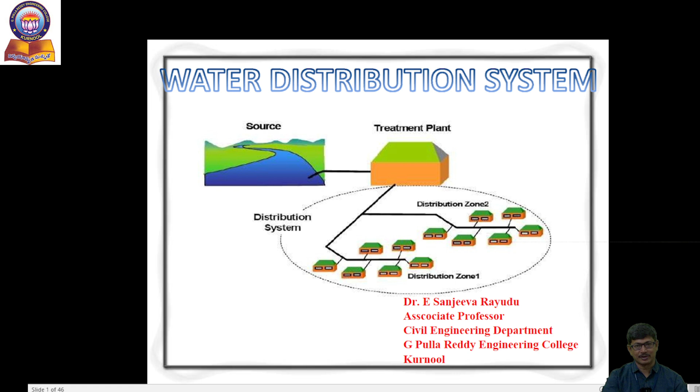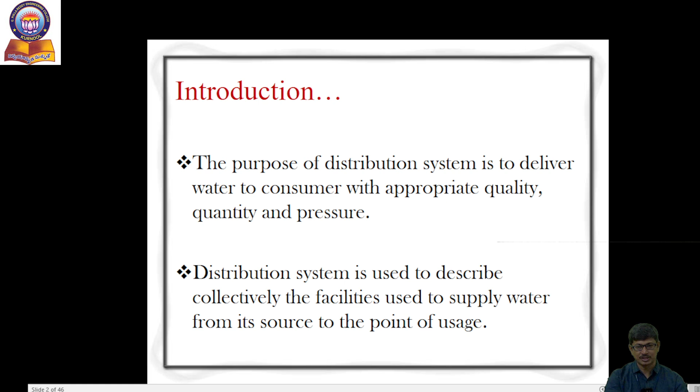The purpose of distribution system is to deliver water to consumers with appropriate quality, quantity and pressure. Distribution system is used to describe collectively the facilities used to supply water from its source to the point of usage.

Water quality should not get deteriorated in the distribution pipes. It should be capable of supplying water at all the intended places with sufficient pressure head. It should be capable of supplying the requisite amount of water during firefighting purposes.

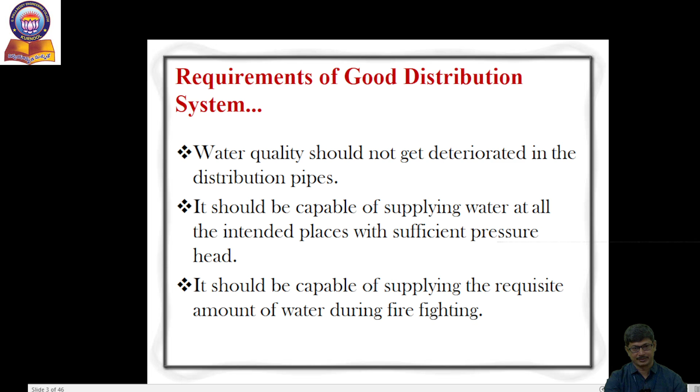So the main agenda of water distribution system: one is to supply sufficient quantity to each corner of town or city. At the same time, in case any fire is existing, we have to supply sufficient quantity for firefighting purpose. So the layout should be such that no consumer would be without water supply during the repairs of any section of the system. That is only possible by underground layout of distribution system, either grid iron system, ring system, or radial system.

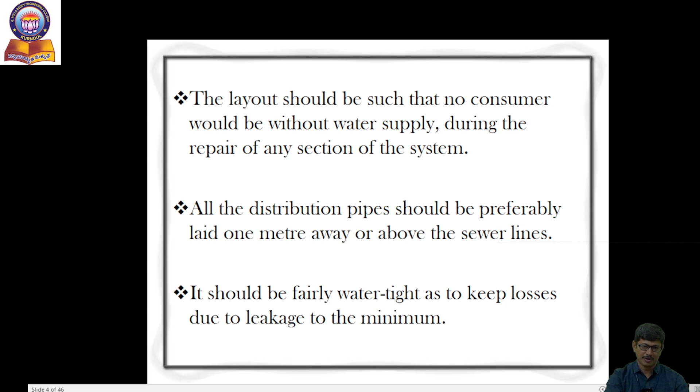All the distribution pipes should be preferably laid 1 meter away or above the sewer lines. At the time of designing, we maintain maximum distance as far as possible between water supply line and sewerage line. It should be fairly watertight so as to keep losses due to leakage to the minimum.

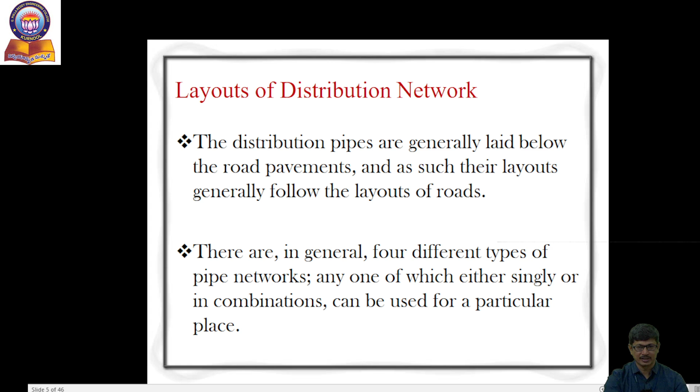The distribution pipes are generally laid below the road pavement, and as such their layout generally follows the layout of roads. There are in general 4 different types of pipe networks, any one of which either singly or in combination can be used for a particular place.

Various types of layout of water distribution system: number 1, dead end system; radial system; grid iron system; ring system. These are the systems of layouts.

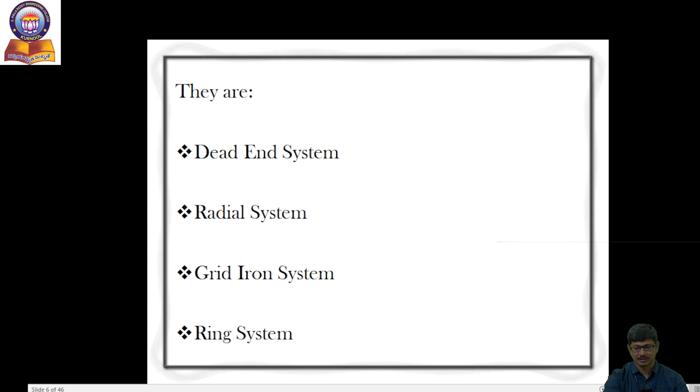This is a dead end system, also called tree system. It is suitable for old towns and cities having no definite pattern of roads, meaning whenever cities are developed in a haphazard manner, this system is more suitable.

In this system, there is only one main pipe, with branch pipes off the main pipes. This system contains fewer cut-off valves; for only one route, generally only one valve is provided.

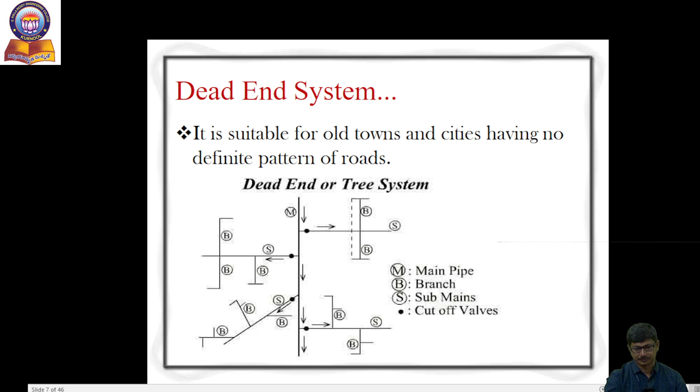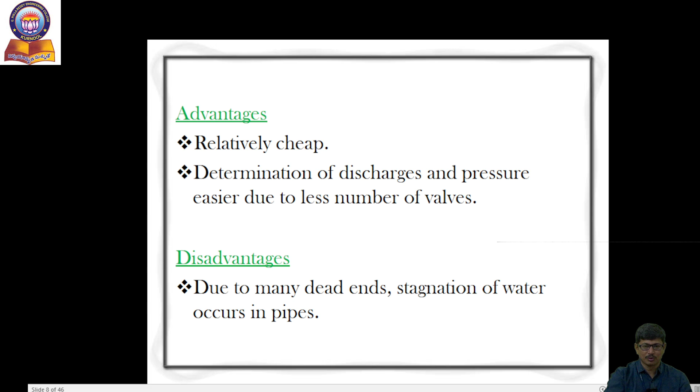The main advantages of this system: it is most economical, and we can easily calculate network analysis, meaning discharge and pressure in each line. Disadvantage: due to many dead ends, stagnation of water occurs in the pipe, which may cause pollution. That is the disadvantage of this system.

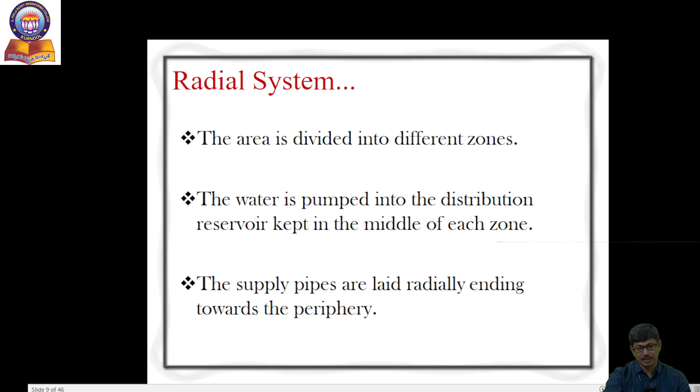This is a radial system. This system is suitable when cities have roads in a radial direction. The area is divided into different zones. The water is pumped into the distribution reservoir kept in the middle of each zone. The supply pipes are laid radially, ending towards the periphery.

This picture shows the radial system. A distribution reservoir is provided at the center, from where water is supplied along the road line in a radial manner. So the main advantages: it is very quick service, and calculation of pipe sizes is easy.

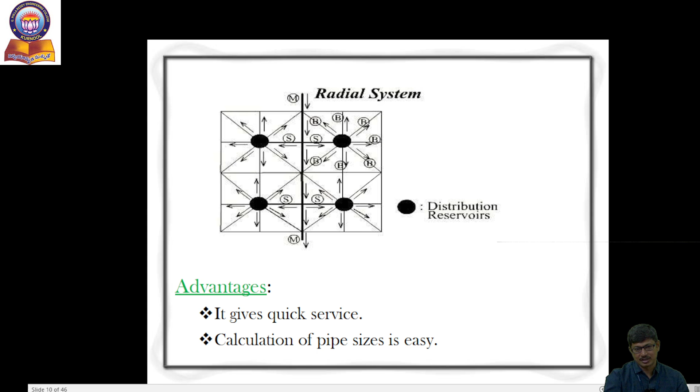Grid iron system: this system is adopted where the cities are well developed with well planning. In such places, generally the grid iron system is provided. It is suitable for cities with a rectangular layout where the water mains and branches are laid in a rectangular pattern.

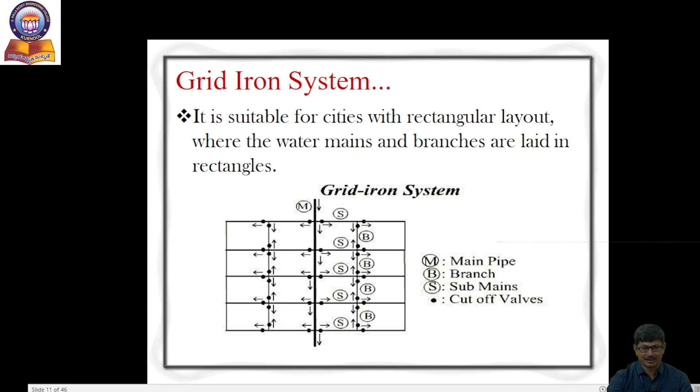In this system, one main pipe is connected to a number of branch pipes and sub-main pipes, all interconnected. The main advantage is due to continuous circulation, the possibility of pollution is reduced, and in case of any breakdown, we can supply water in another direction, in a number of directions.

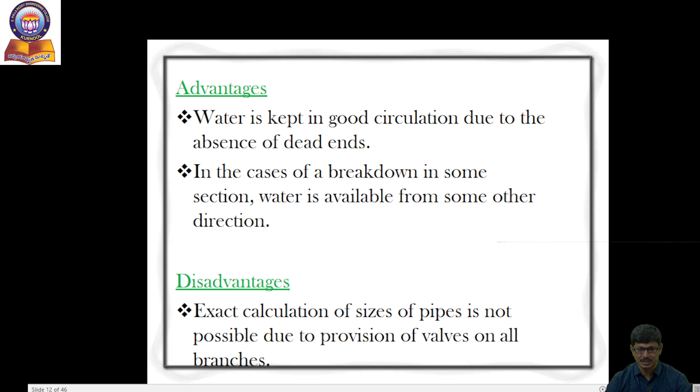Even if fire occurs, we can supply water in many ways to control the fire. Disadvantages: calculation is very difficult, network analysis is required, and more valves and more cutoff valves are needed.

This is a ring system. In this system, along the periphery of roads, sub-main branches all branch out from the mains. This system also follows the grid iron system with a flow pattern similar in character to that of the dead end system. So determination of the size of pipes is easy in this system.

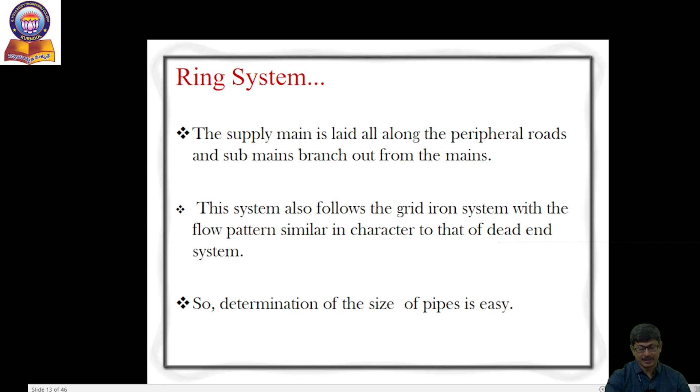Advantages and disadvantages are the same as the grid iron system. In this system, possibility of pollution is very less because all are interconnected, and we can supply water in different ways. Another main disadvantage: network analysis is very difficult.

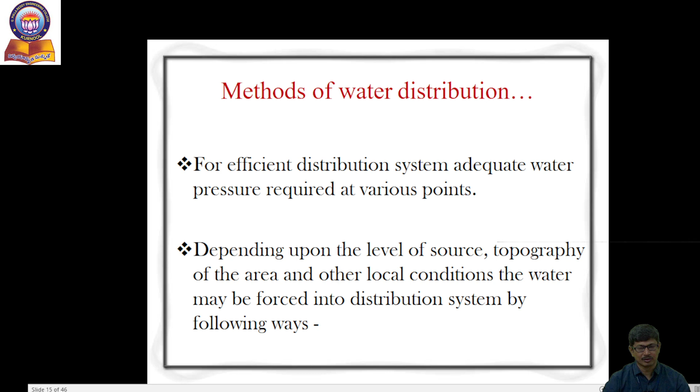So, methods of water distribution or systems of water supply: we supply depending upon source, topography, and other conditions. We design in three systems: one is gravity system, another is pumping system, and the third is combined gravity and pumping system.

In gravity system, it's suitable when the source of supply is at sufficient height. It is the most reliable and economical distribution system. The water head available at the consumers is just the minimum required; the remaining head is consumed in frictional and other losses.

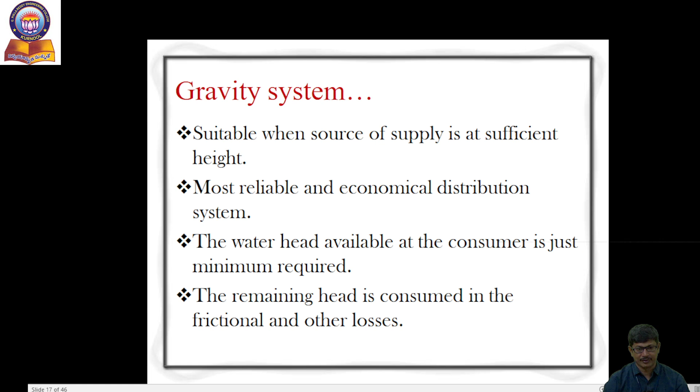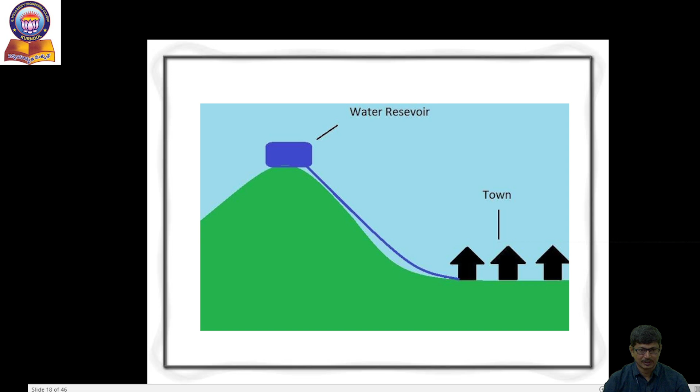This picture shows a gravity system where the source is available at a high level when compared to the town or cities. So we can supply water with the action of gravity, without providing any pumping.

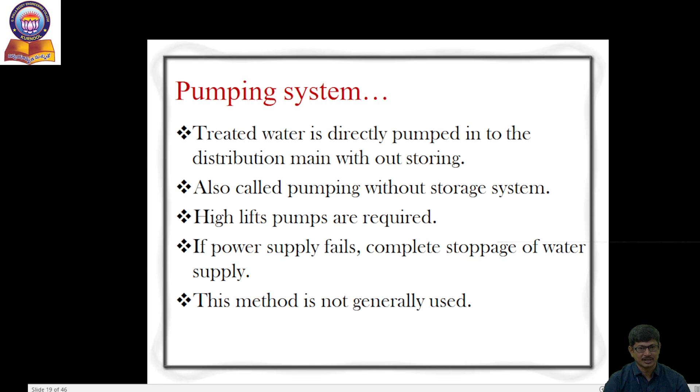This is a pumping system. Treated water is directly pumped into the distribution main without any storage, also called pumping system without storage. High lift pumps are required with variable pumps. If power supply fails, there will be complete stoppage of water supply. This method is not generally used; it's only used where there is no overhead tank, especially in rural areas and villages.

This is a combined gravity and pumping system. It is the most commonly used system. Here, water is generally stored in an elevated distribution reservoir, then supplied by the action of gravity based on demand. The excess water during low demand periods gets stored in a reservoir and is supplied during high demand periods. This is the most economical, efficient and reliable system, mostly adopted in all towns and cities.

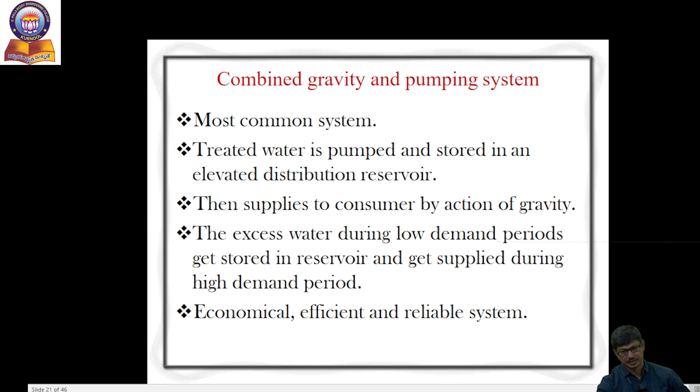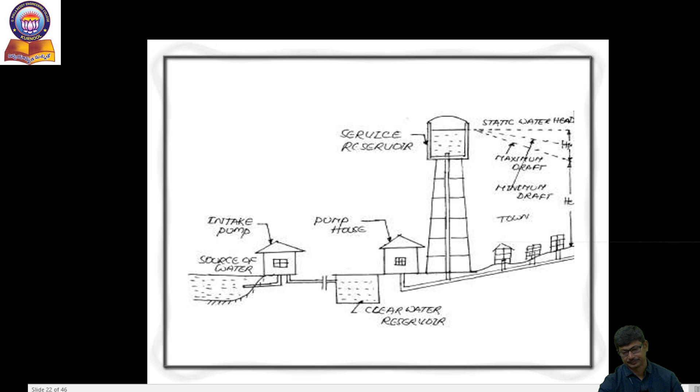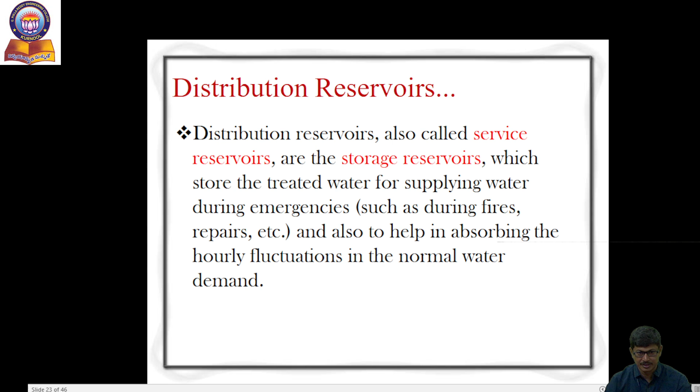Next is the distribution reservoir, also called service reservoir or storage reservoir, which stores treated water for supplying during emergencies and helps absorb hourly fluctuations in normal water demand. Its functions are: to absorb hourly variation in demand, to maintain constant pressure in the distribution mains, and to supply water during emergencies.

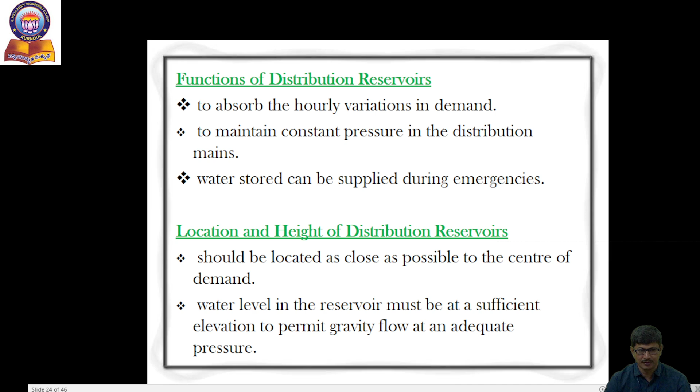Regarding location and height of distribution reservoir, it should be located as close as possible to the center of demand. The water level in the reservoir must be at a sufficient elevation to allow gravity flow at adequate pressure.

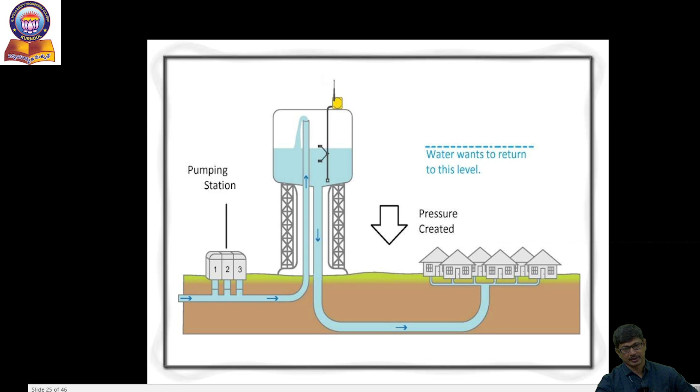This shows water distribution with elevated reservoirs and storage. In this example, a pumping station below the storage reservoir pumps water up to the elevated reservoir, from where we supply water by the action of gravity.

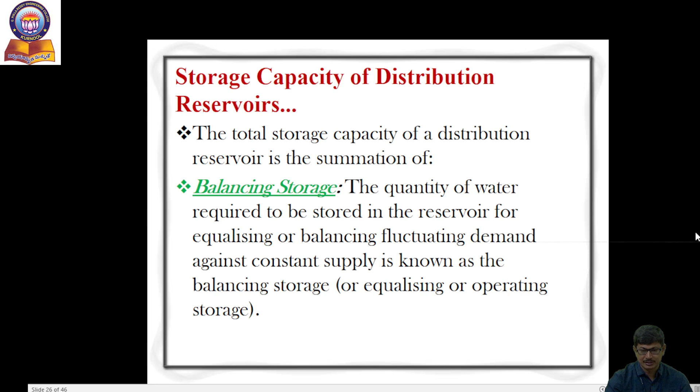The storage capacity of the distribution reservoir is generally calculated based on the mass curve method. Its main functions are: balancing based on demand and supply, and providing breakdown storage in case of power failure, so water can be supplied continuously whenever power fails. A value of about 25% of total storage capacity, or 1.5 to 2 times the average hourly supply, may be considered as the provision for this storage.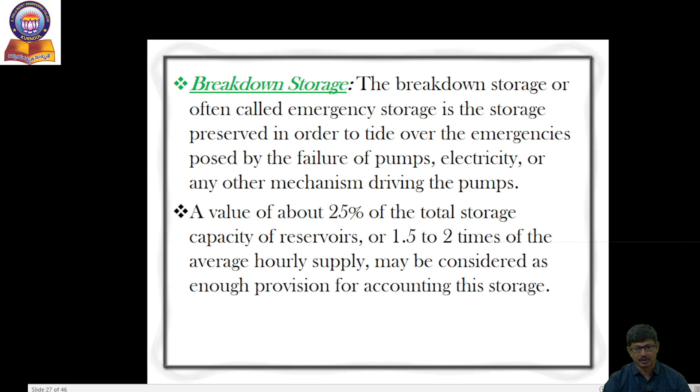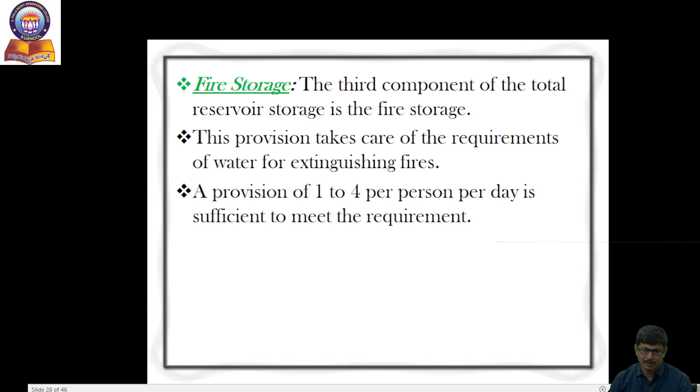Fire storage is water stored separately in the reservoir for fire demand purposes. When a fire occurs, only that water is used for firefighting. A provision of 1 to 4 liters per person is sufficient to meet the requirement. For example, for 4 lakh people in a town or city, 4 lakh times 4 liters is stored separately for firefighting purposes.

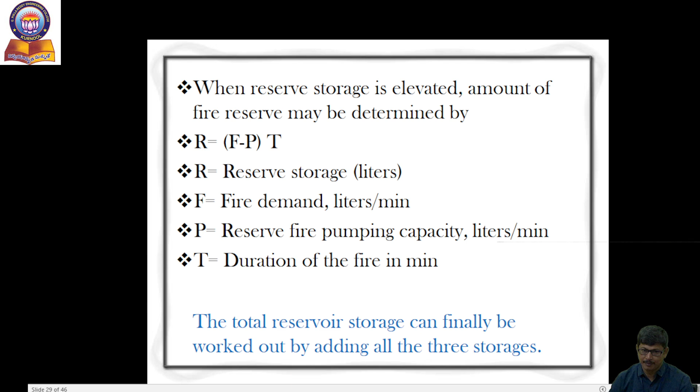This is the process for calculating reserve storage: R equals reserve storage equals (F minus P) into T, where F is fire demand, P is reserve fire pumping capacity, and T is the duration of the fire in minutes.

Supplying water requires certain water supply appurtenances, specifically pipelines and valves, as well as fire extinguishers. These are required along the pipeline network system and are called water supply appurtenances.

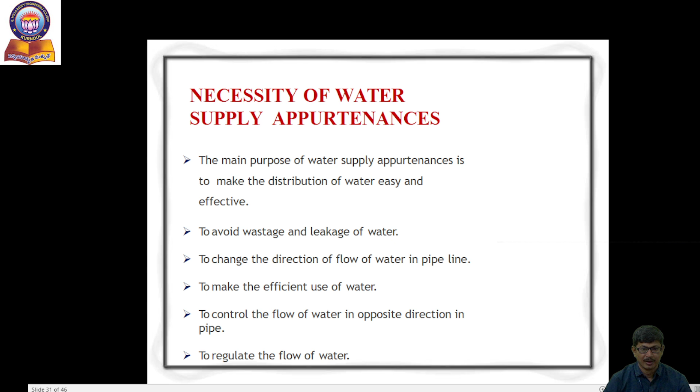The necessity of water supply appurtenances: to make the distribution system easy and effective, to avoid wastage and leakage of water, to change the direction of flow in the pipeline, to make efficient use of water, to control flow in the opposite direction in the pipe, and to regulate the flow of water.

Whatever appurtenance is used in the water supply system, it should be strong, durable with a long life, economical from a cost point of view, resistant to corrosion from acidity or alkalinity if present, resistant to the internal pressure of water, easy to remove and repair, and not affected by chemicals and acids.

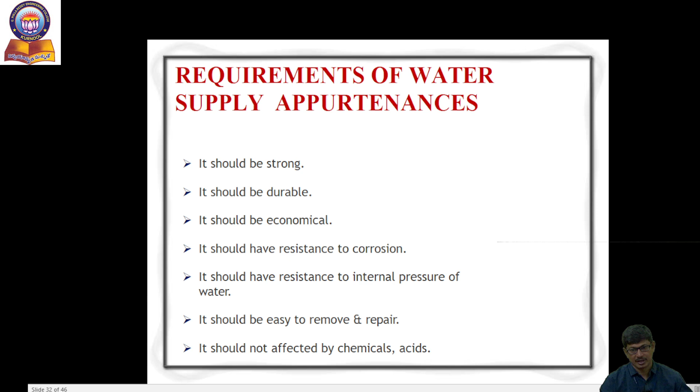One of the water supply appurtenances is valves. Valves are mainly provided along the water supply system to control the flow, release pressure, and release any air locking, and for that purpose valves are provided along the water supply network system.

The main functions of valves are: stopping and starting flow, reducing or increasing flow, controlling the direction of flow, regulating flow or process pressure, and relieving a pipe system of certain pressure.

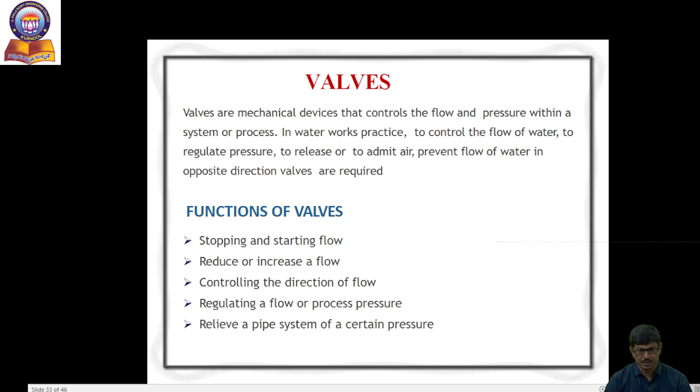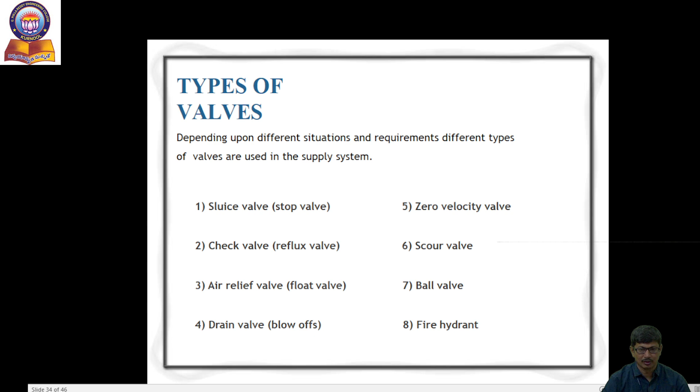The types of valves are: sluice valve, check valve, air relief valve, drain valve, zero velocity valve, scour valve, ball valve, and fire hydrant valve. These are the types of valves.

So there is sluice valve, sometimes known as gate valve. The main function of this valve is to stop the flow in main pipes.

This is made of cast iron having a brass or stainless steel mounting at its end fitted with a pipe, a circular wedge shaped disc attached to the end of a threaded spindle passing through a gland. This is connected to a handle by means of threaded spindle, and can be used to control or regulate the flow.

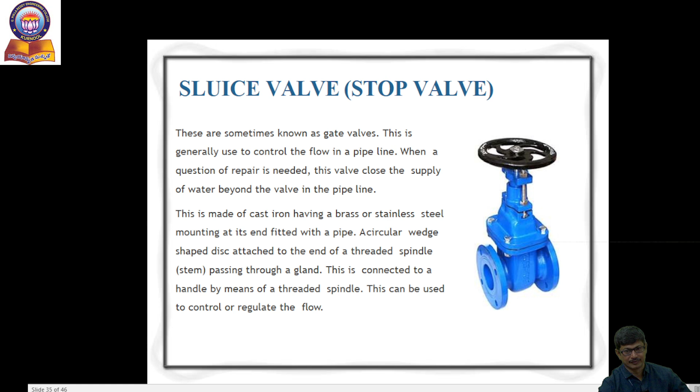This valve is generally provided in a straight pipeline at 150 to 200 meter intervals. When two pipelines intersect, valves are fixed on both sides of the intersection. For long straight mains, sluice valves can be installed at a distance of about 1 kilometer to divide the pipe into different sections.

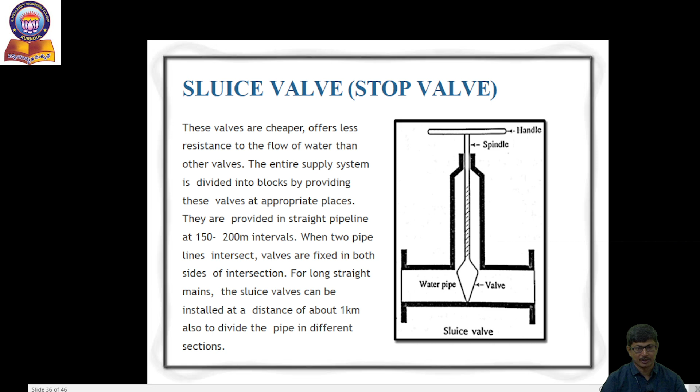Next valve is called check valve, also called reflux valve. These are generally provided in pumping units. Water is only allowed in one direction, not allowed in the opposite direction, which is why it's called a non-return valve. A reflux valve is an automatic device which allows water to go in one direction only.

The swing type of reflux valve is widely used in practice. When the water moves in the direction of the arrow, the valve swings and rotates around the pivot, kept in open position due to the pressure of water. When the flow of water ceases, the water tries to flow backward, but this valve prevents passage of water in the reverse direction. These are especially provided in pumping units as non-return valves.

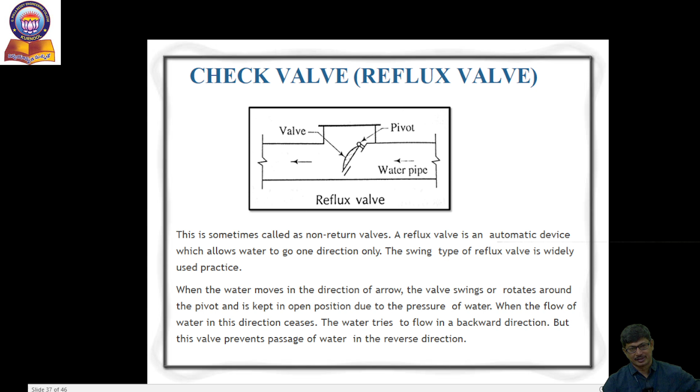There are two types of check valves: swing check valve and lift check valve.

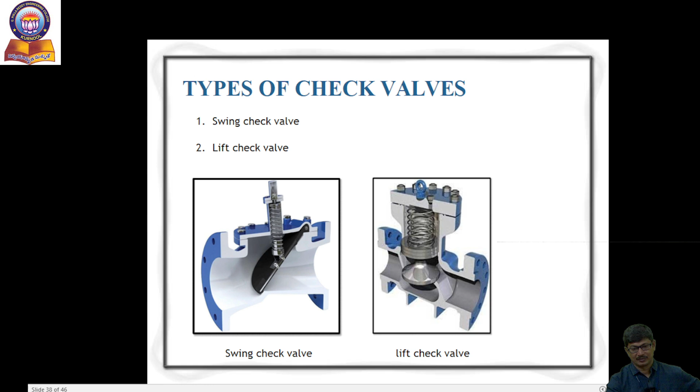This is another valve, the air relief valve. It is generally placed at high positions in a pipeline summit where, whenever water is releasing and stopping, air is blocked. For releasing this air, air relief valves are provided.

These valves remove the accumulated air automatically. They have one or two hollow float chambers with an air opening at the top, and the valves are connected to the main as indicated in the figure. The float chamber normally remains full of water. When air fills it, the water level goes down and the float falls, thereby opening the air opening at the top through which air escapes out.

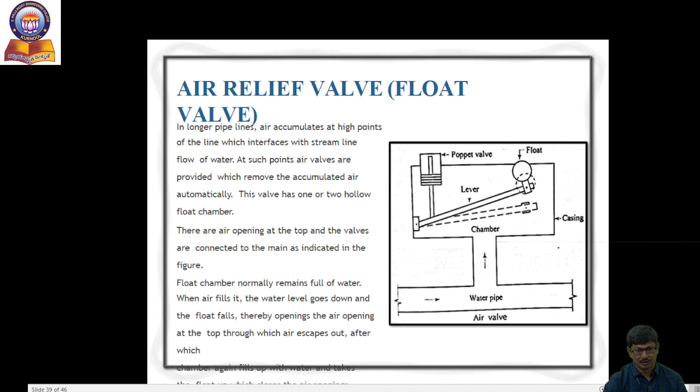This picture shows the air relief valve, a float type. Whenever water is allowed, it automatically opens, and when closed, it automatically closes. This is compulsory in some places.

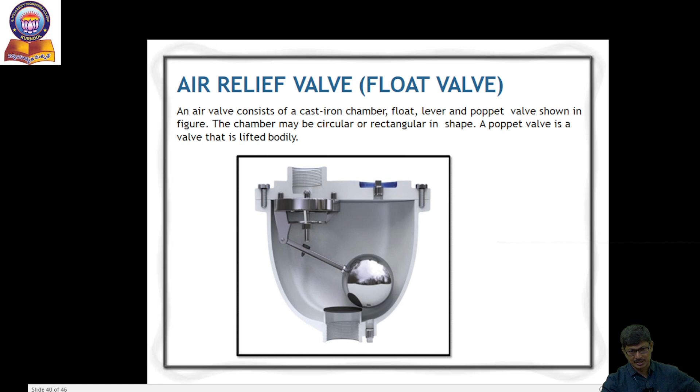This is called a drain valve or blow-off valve, generally provided in low-level areas for cleaning all water supply pipes. These are also called washout valves. They are provided at all dead ends and depressions of pipes to drain out the wastewater. These are ordinary valves operated by hand.

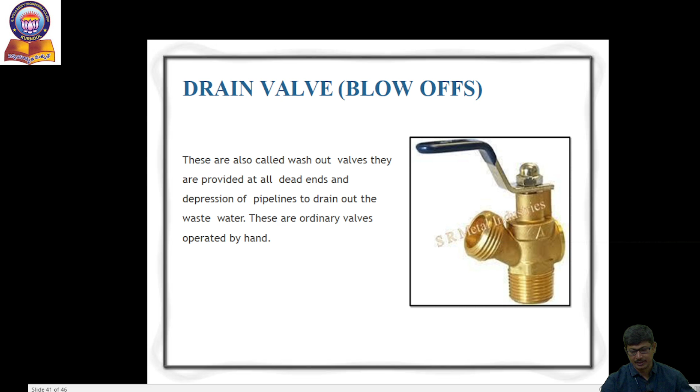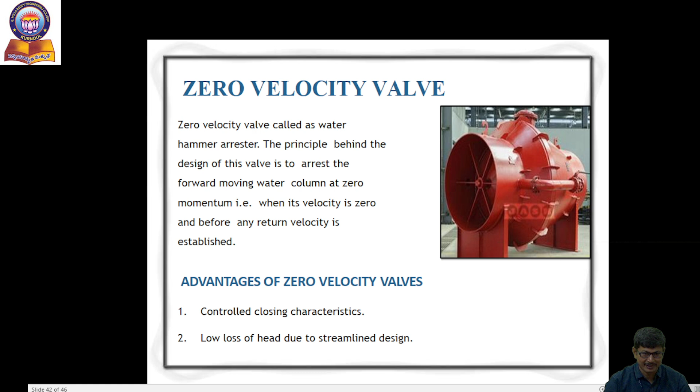Zero velocity valve, this is called a water hammer arrestor. The principle behind the design of this valve is to arrest the forward moving water column at zero momentum, that is when its velocity is zero and before any return velocity is established. The main advantages of this zero velocity valve are to control the closing characteristics and low loss of head due to streamlined design.

Scour valve, this is another type of valve for pipelines, provided where we clean those places. These are operated by hand. Generally it is placed at every depression in a pipeline to remove any silting or deposited matter from the pipeline for cleaning.

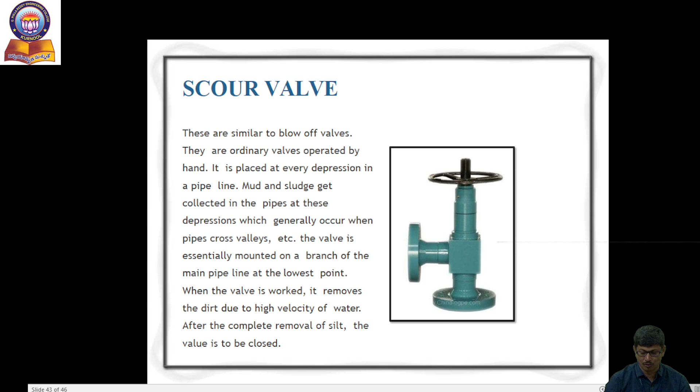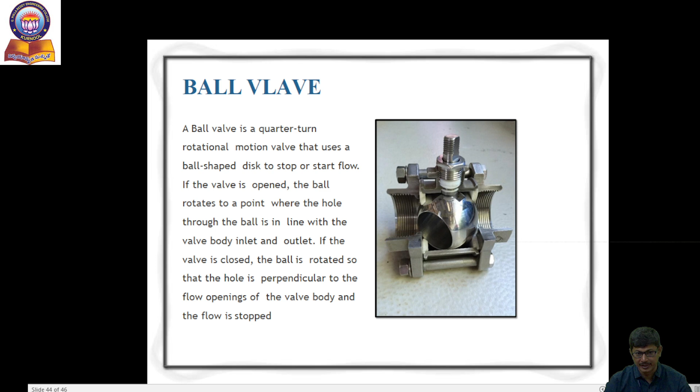This is another type, the ball valve, generally a quarter turn rotational motion valve that uses a ball shaped disc to stop or start flow. If the valve is open, the ball rotates to a point where the hole through the ball is in line with the valve body inlet and outlet. If the valve is closed, the ball is rotated so that the hole is perpendicular to the flow opening of the valve body and the flow is stopped.

Next is another water appurtenance: fire hydrants. Generally the fire hydrant has one outlet, provided for tapping water. They are located at 100 to 150 meters apart along the roads, and also at every junction and corner. Generally there are two types.

One is flush hydrant and the other is post hydrant. Sometimes these fire hydrants are used for filling municipal water tanks for supplying some low-lying areas where there is no water supply system lines. That place is generally supplied water by water tanks, so for filling these water tanks, these fire hydrants are used.

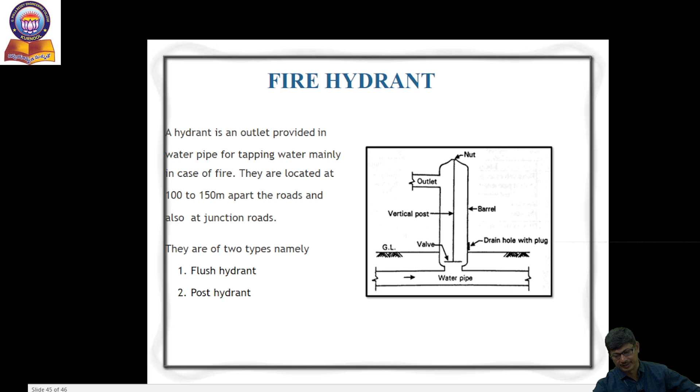Generally these are colored red, like a post box, for easily identifying these fire hydrants. At the time of construction, fire hydrants should be cheap, easy to connect with hose or motor pump, and easy to detect, detachable and reliable. It should function properly and not go out of order during operation. It should permit undisturbed flow of water when being fully opened.